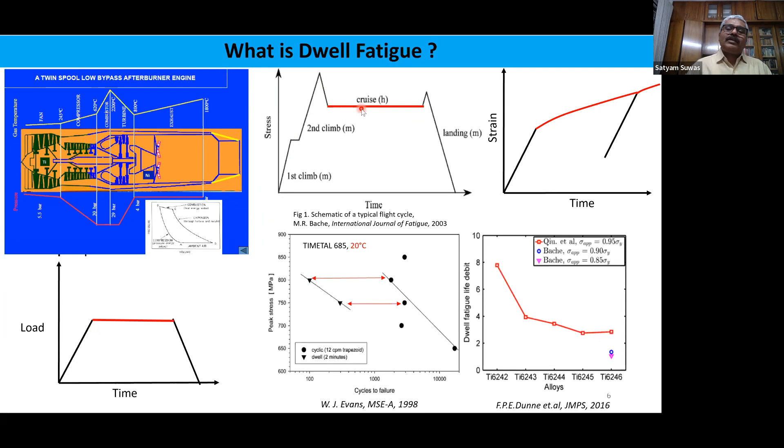And then this holding of aircraft at this level of stress actually leads to quite a lot of interesting phenomena, which are not very interesting from the user's point of view, because it leads to some amount of degradation in properties of the material and components, and therefore we have to find out the reason for this.

And this was known for a long time. In fact, in 2003, a comprehensive paper was published by Professor Bache from, I think, England, and he has given a complete comprehensive analysis. But this was a phenomenological analysis.

Later on, many investigators have associated this phenomena with crystallographic attributes, also with textures. Many texture people got interested in it, and the intensity of work has increased ever since EBSD techniques have become more common.

This phenomena is seen in many metals. First it was reported in Timetal 685, also known by RMI titanium as IMI 685, observed at 20 degrees Celsius, that is ambient temperature. One main reason attributed to this is room temperature creep in the system.

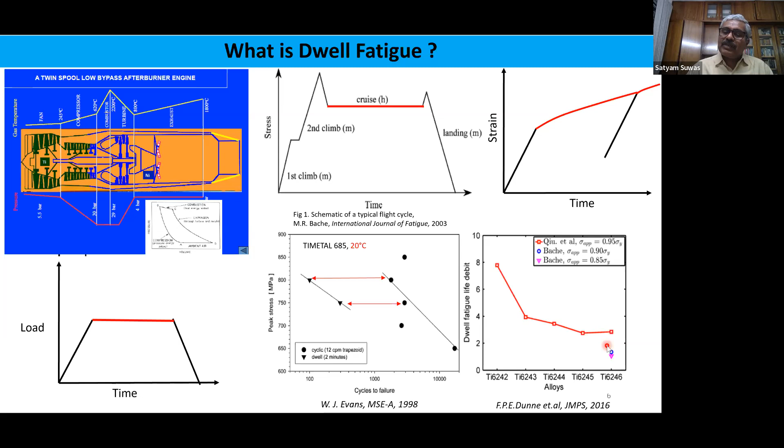Though it qualifies for all other good aeronautical properties, it has a very strong sensitivity towards dwell fatigue. Dwell fatigue debit is a kind of parameter for the early occurrence of fatigue damage, and it is maximum for this alloy. Once one adds more alloying elements, basically increasing molybdenum concentration, it becomes saturated, but still there is dwell fatigue observed in this material.

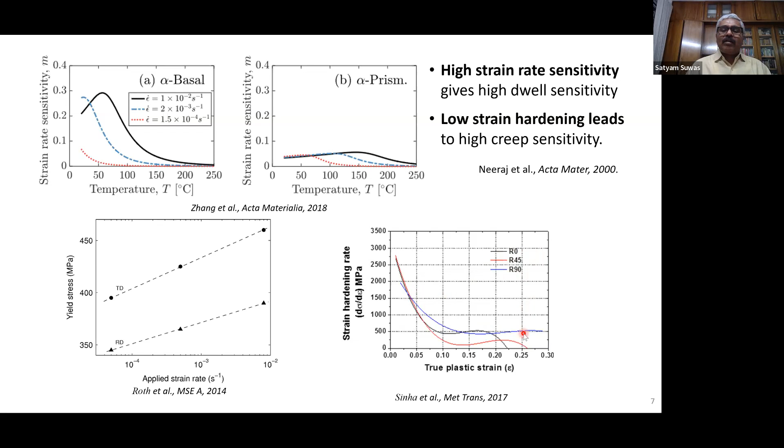Also, the strain hardening rate in titanium is sensitive to the direction in which we take the sample, again a function of texture. We can see that along rolling direction, at 45 degrees to rolling direction, and at 90 degrees to rolling direction, we have different responses of strain hardening rate versus true plastic strain.

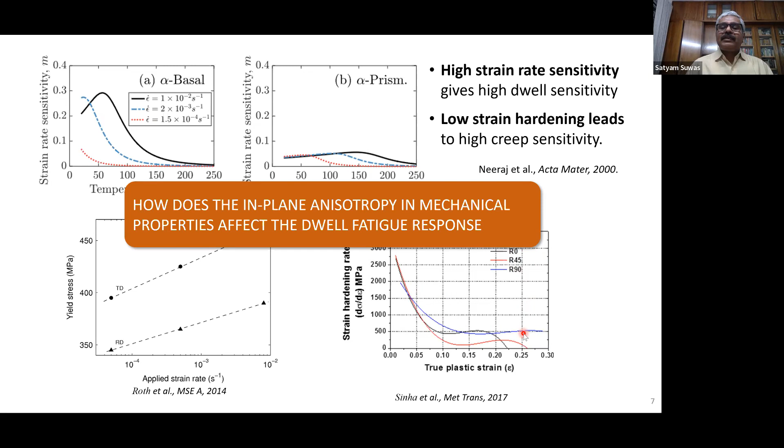Now we wanted to examine one by one many reasons that would lead to this dwell fatigue response, so that remedial measures can be recommended for this material one after another. The first thing is in-plane anisotropy, that is one that we wanted to see.

So first is strain rate sensitivity. Second is anisotropy, that means the texture. Third is the propensity of grain boundary sliding. And this again is a function that is sensitive to the direction and the texture of the material.

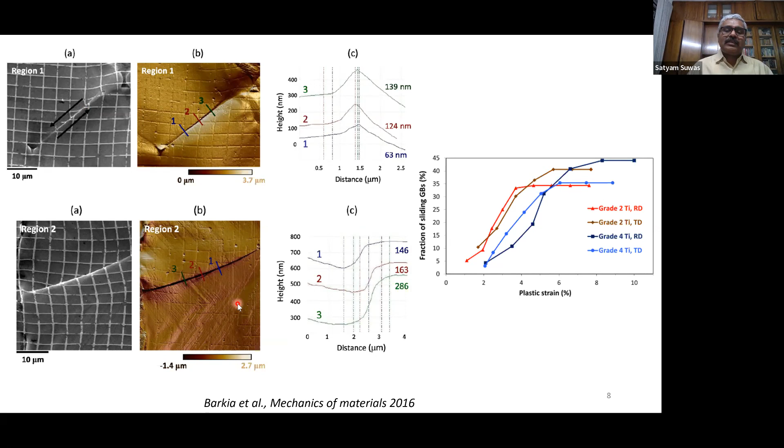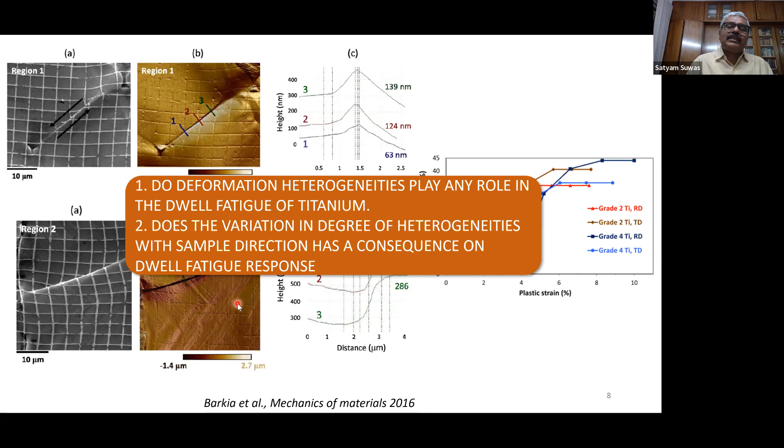So now the question is whether deformation heterogeneities play any role in the dwell fatigue of titanium, because the heterogeneities we could see here very clearly. We also wanted to examine whether this variation in degree of heterogeneities with sample direction has a consequence on dwell fatigue response. This was a very comprehensive work done by Adam Pilchak and Jim Williams, and they examined the dwell fatigued sample.

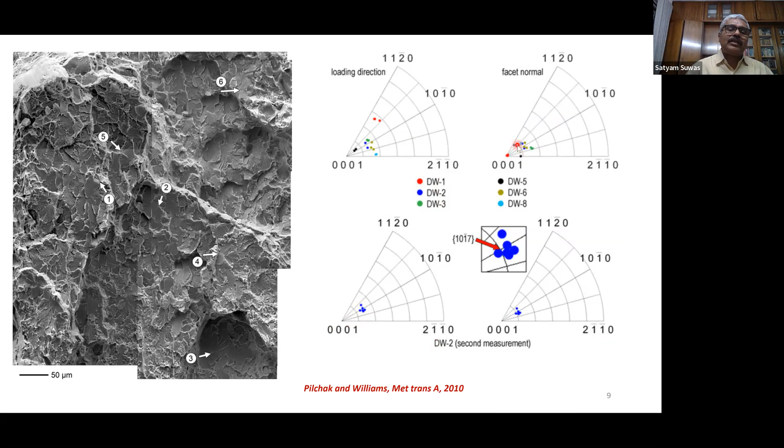They examined the fractography of the dwell fatigued sample, and found that most of the grains where fatigue crack initiation has taken place are very close to basal orientation. In various cases this has been examined, and almost all the orientations of grains where dwell fatigue cracks have initiated are primarily close to basal orientation. May not be exactly basal, but very close to it, like for example here it was identified to be {10-17} orientation.

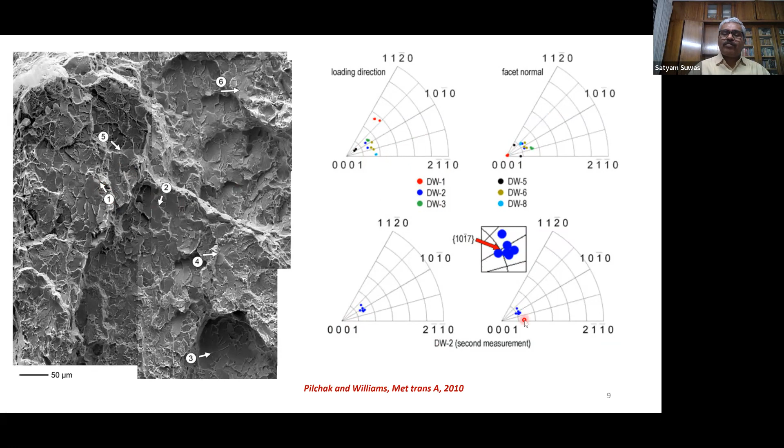So the theory behind this, the knowledge generated so far was, the first model is the Stroh model, and it says that fatigue cracks will initiate when a soft grain meets a hard grain. In that case, fatigue crack initiation takes place because of the pileup of dislocations at the boundaries of the hard grain.

There have been several other investigations, and I would like to mention one particular thing which came from Metz. Lionel Germain and Nathalie Gey did this work on IMI, if I remember correctly it was IMI 834, and they identified that the material prone to dwell fatigue had very strong macro zones. This validates the Stroh model, that wherever there is a strong basal orientation, the basal grain should be surrounded by non-basal grains.

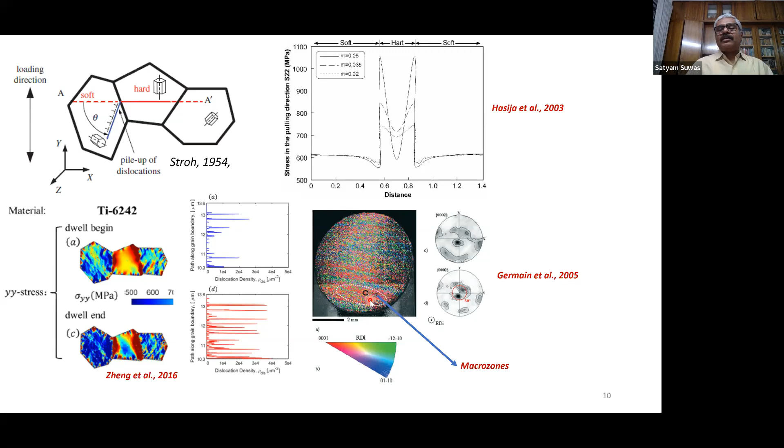In that case, macro zones will form, and this could lead to dwell fatigue debit, meaning the propensity of reducing the life under dwell fatigue loading conditions. So these are some of the available knowledge.

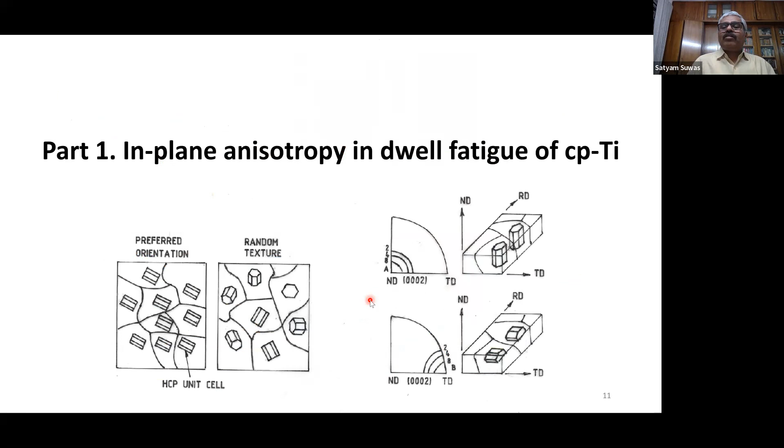So we wanted to examine this systematically, and first we investigated the in-plane anisotropy of dwell fatigue. We just took CP titanium, because the alloy has shown varying response between different alloys, and the phenomena explained by all the theories just deal with HCP phenomena related to titanium. So we wanted to exclude all variables, including the presence of beta phase which occurs in alpha-beta titanium alloy as seen in most investigations. So we just took commercially pure titanium and examined the fundamental aspects of dwell fatigue propensity.

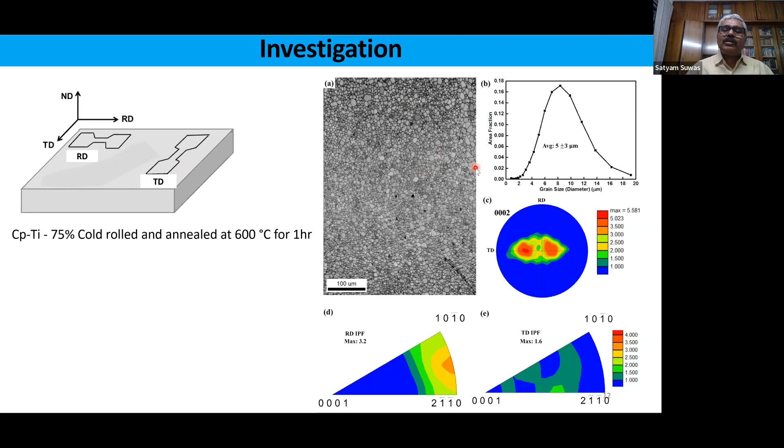First of all, the anisotropic aspect: we took a plate of CP titanium obtained by cold rolling and annealing, with nice equiaxed, very fine grains, about 5 to 8 microns in most cases, and it had a split basal texture, which is very common in titanium. TD split texture is common in titanium or any hexagonal material with C by A ratio or axial ratio less than critical. This was observed, and then this material was taken further for study.

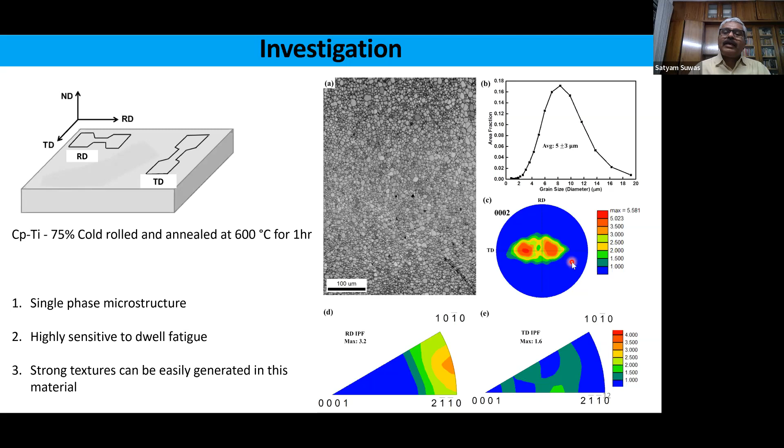Because this combination, according to us, would lead to high sensitivity for dwell fatigue. And since in CP titanium it's easy to generate very strong basal texture, we generated it and then did the test of this material, and here is the result.

This is the loading cycle that was employed. In order to have a comparative idea, we did normal fatigue with this kind of profile: one loading and then unloading, loading and unloading. In the other case, for the dwell fatigue condition, we loaded it, kept it at that load for 120 seconds, for 2 minutes, and then unloaded it, and the second cycle starts in the same way. So this is the normal fatigue, and this we will refer to as dwell fatigue.

The strain versus cycle plot very clearly confirmed what was anticipated from indirect responses about anisotropy: the material extracted along the transverse direction showed dwell fatigue sensitivity in this manner, accumulating very high strain in a very short cycle. For the material along the rolling direction, the strain accumulation versus number of cycles followed a different trend. Under normal fatigue also this was similar, only the degree was a little higher in the case of dwell fatigue compared to normal fatigue conditions.

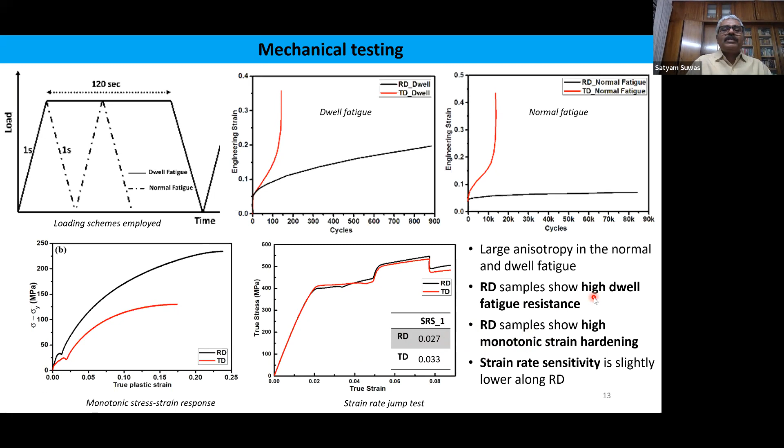Then we examined the formation of texture in this material: the way these grains hardened, or the way the texture evolution took place after deformation along the rolling and transverse directions, made a contrast. For example, the sample extracted along the transverse direction and subjected to tensile test underwent stronger changes in texture, or has textures slightly different from the one tested along the rolling direction.

We could see here the changes in the texture. Like tensile, the rolling direction samples under tensile testing accumulate strain and get oriented mostly along the RD direction after the tensile test, which is expected. In dwell fatigue, they also accumulate strain along this direction, but under normal fatigue the texture seems to have weakened, and the TD direction sample never acquires any strong texture.

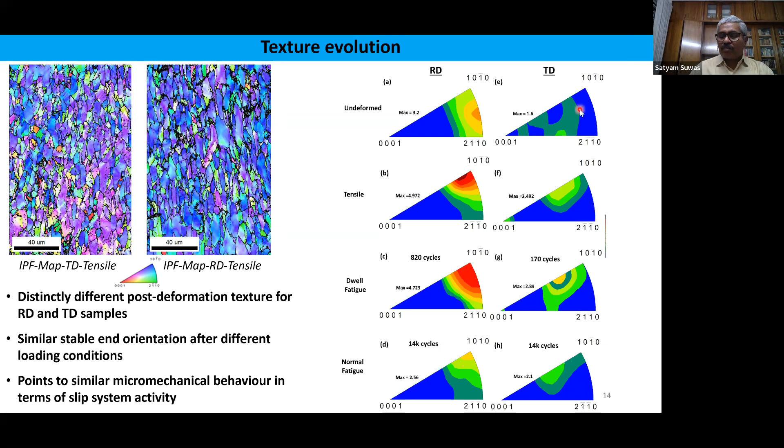So we just examined the slip response along these directions. Schmid factors were calculated for basal, prismatic and pyramidal slip systems, the three important slip systems in hexagonal materials. We calculated the slip response for all three types of slip, and we could see that the responses were different.

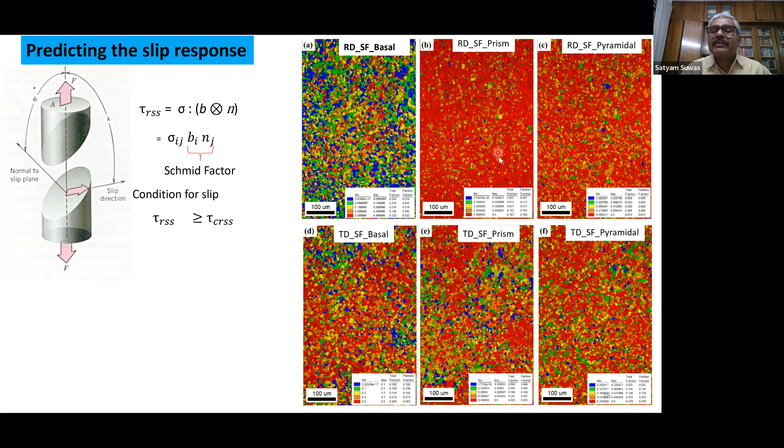For example, for basal slip, this figure has small numbers, and it shows the fraction increasing, the minimum increasing from red to blue. So if there is more red, that means there is a maximum value of Schmid factor for those cases. So the responses were different and mixed for all the cases.

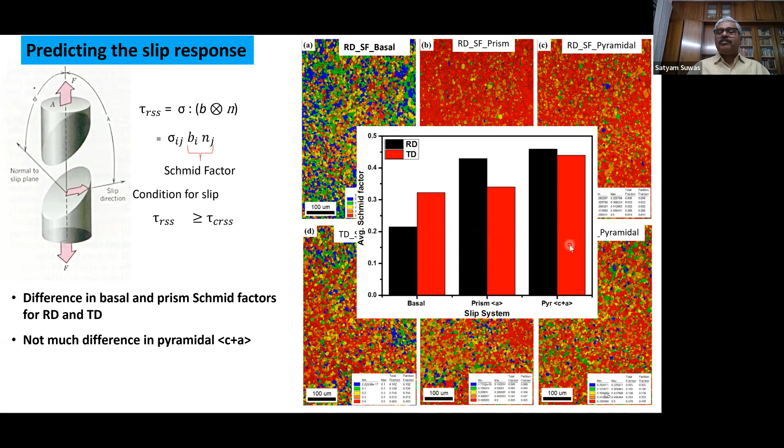Here it's more clear, extracted from the same data: the average Schmid factor for basal slip was lower for the rolling direction sample and higher for the transverse direction sample. Similarly for prismatic slip, the order was reversed, and for pyramidal slip it was almost similar with a little bit of difference.

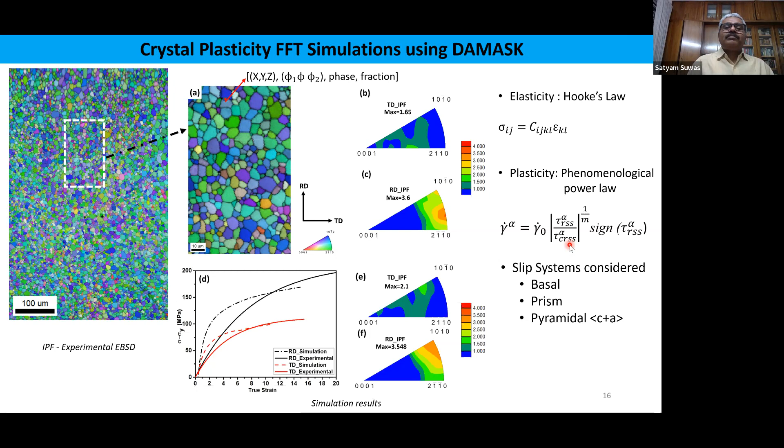This was also subjected to investigation. The prediction of strength anisotropy was carried out using Dusseldorf-originated software, DAMASK, which almost everyone uses now. Particularly this part of the experimental scan from EBSD was used, and this is enlarged here.

We used this simple phenomenological power law, considering all three types of slip systems, and calculated the inverse pole figure. Most importantly, the stress-strain curve was calculated after deducting yield strength. We could see the differences were almost in the same order, except that saturation occurred much earlier with simulation, with a little deviation from experiments at higher and lower strains, but the curve passes through this, so this much deviation is expected.

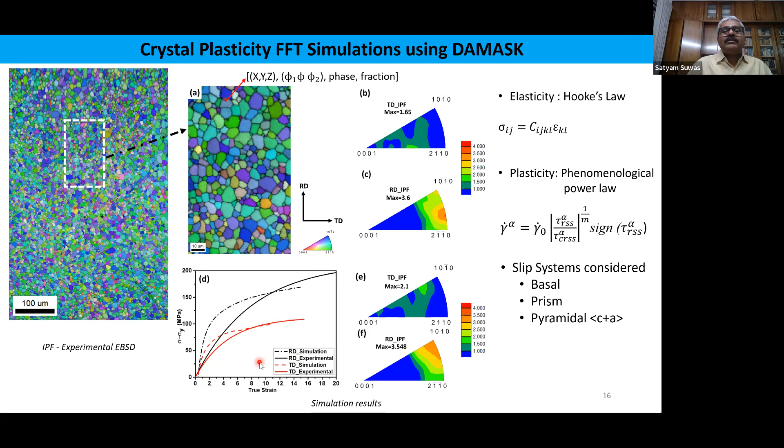Now the prediction of activities of slip systems is seen here. For RD loading, there is higher prism and lower basal slip activity. For TD loading, there is lower prism slip and higher basal slip activity.

It's also to be noted that titanium shows anisotropy in stacking fault energy, so the hardening behavior is also influenced by this anisotropy. On the prism plane the stacking fault energy is about 150 millijoules per meter squared, while on the basal plane it is 300 millijoules per meter squared. So it's as good as working on different materials, if we consider the FCC-type situation.

So after that, we could predict the activities. The slip activity maps are shown here. For RD samples, the basal slip activities are shown, and the propensity of a particular slip activity is shown through this scale, with the highest being red.

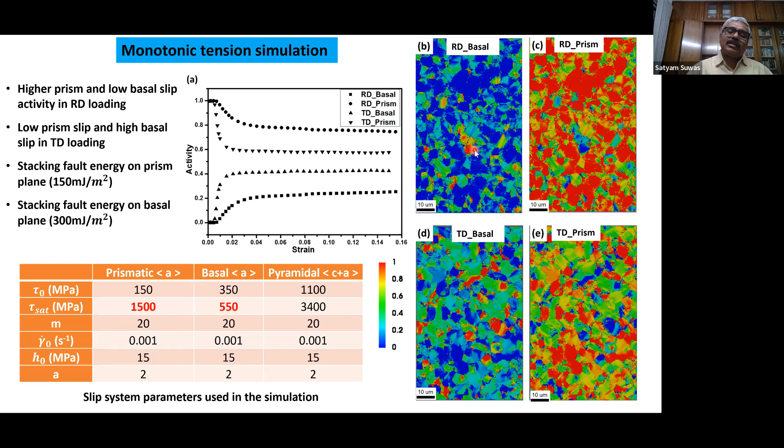Here we could see some hot spots, the red ones. For prism slip, it is obviously the inverse, so it's maximal here - it's prism dominated, the red one.

Then similarly for the TD case, the trend was different. For basal, it has shown more hot spots here and there, in all these cases. And for TD prism slip, it has again shown lots of hot spots, higher propensity of Schmid factor here.

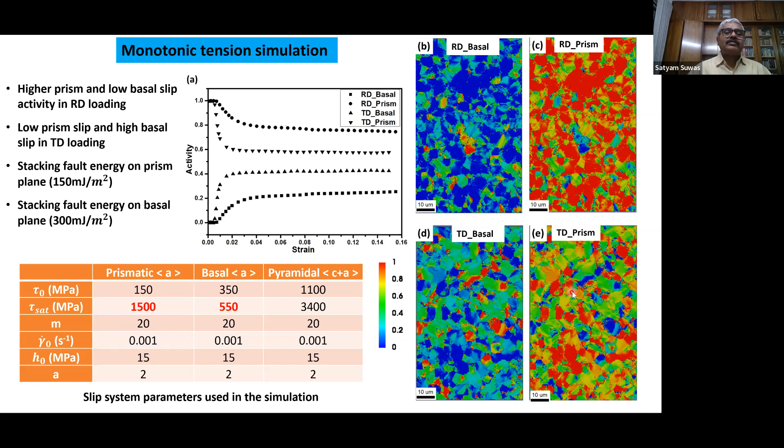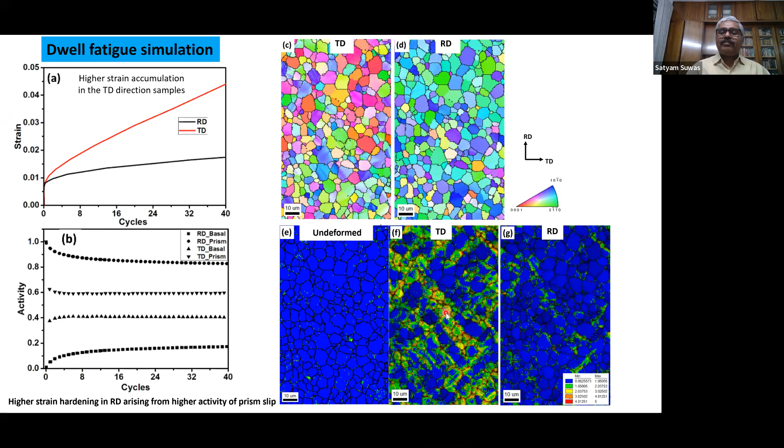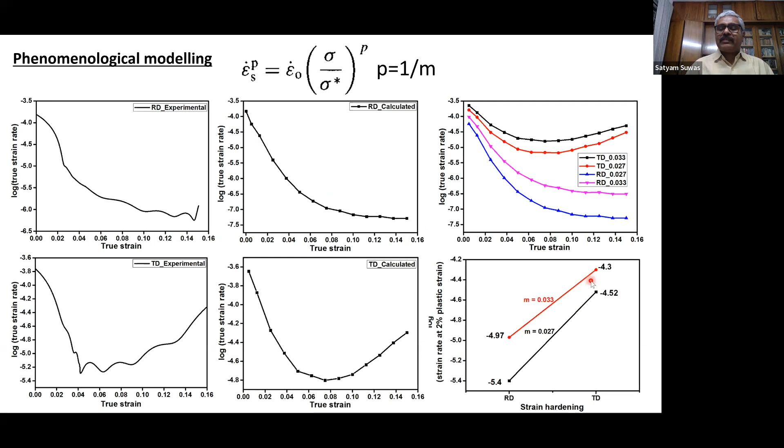These fatigue tests were also modeled, and basically strain hardening and all kinds of modeling was done for strain rate versus strain under these cases. We could see almost a very similar situation as in experimental cases, and we could also see the strain rate sensitivity values as anticipated, as per whatever we experimentally calculated.

So with this understanding, we could summarize this part: a larger planar anisotropy is observed in dwell fatigue response, and it is definitely anisotropic. Dwell fatigue life is higher along RD than TD, and strain rate sensitivity is lesser in the case of RD than TD. Strain hardening response is higher in RD than TD, and activity of prism slip is more in RD than TD, which is responsible for intrinsic strain hardening of the material and also accounts for the difference in stacking fault energy.

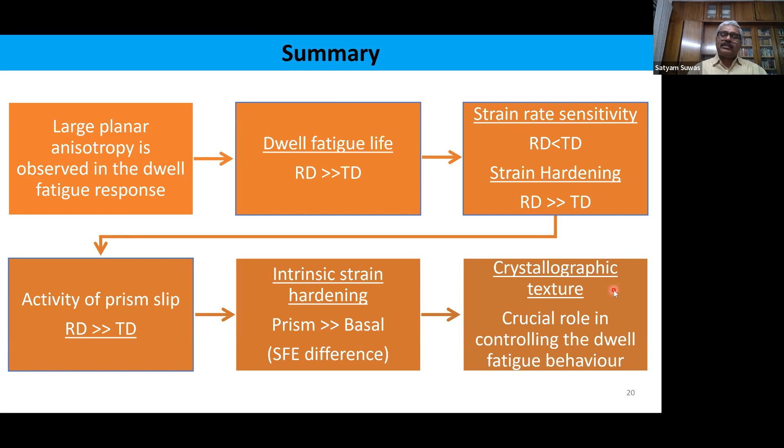This clearly tells that texture plays a crucial role in controlling dwell fatigue behavior. We have not changed different types of texture, but just extracted samples along different directions, which essentially represent two different types of textures. The planes are the same, but the directions are different, and this indicates that the dwell fatigue phenomenon is texture sensitive.

To our surprise, when we examined the deformed microstructure on these well electropolished samples, we did some profilometry and could see differences. We could see the formation of ledges along the grain boundary. In the case of RD samples, the grain boundaries looked very normal, while in the case of TD samples, we could see ledge formation.

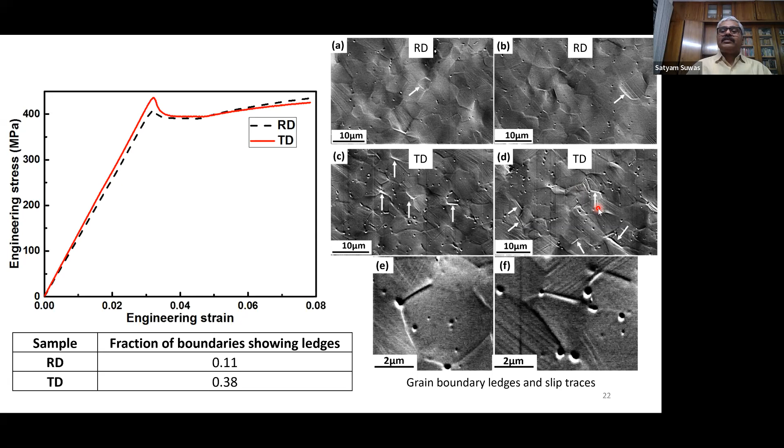This is also a function of the direction in which we extracted the sample, and we could clearly see a substantial difference in the grain boundary fraction consisting of ledges between RD and TD samples, almost 4 times more ledges observed in TD samples. Roughness of the sample was also measured; all were initially polished to the same extent, but TD samples were clearly rougher than RD samples.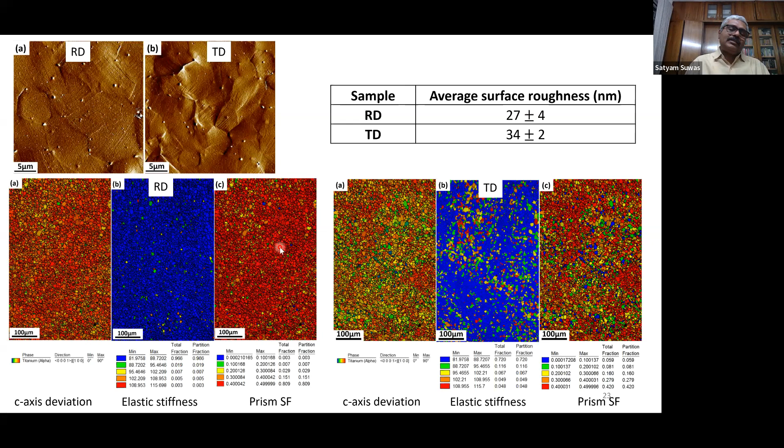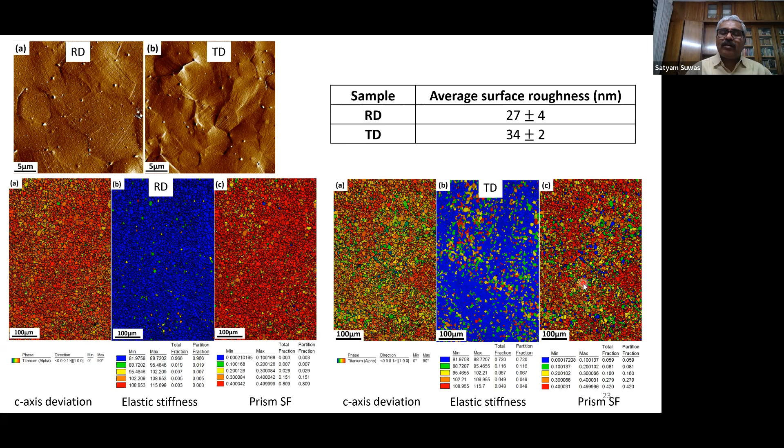A similar investigation was done in the previous case, but here we completed the whole investigation on one sample for which we measured these microstructures, and we could see a difference in the trend observed between RD and TD.

We tried to measure the KAM for these two samples, and there is some difference in KAM values, kernel average misorientation values, from the EBSD maps between RD and TD samples. About 25% difference was clearly observed, and in TD samples, as evidenced earlier, there is strain accumulation right at the grain boundary, and therefore a larger misorientation along certain grain boundaries.

So we can see that all these changes in KAM values are very apparent near the grain boundaries. Basically, the grain boundary affected zone has more slip systems active in order to have compatibility with another grain. So it is quite expected, but the degree was totally different in both cases.

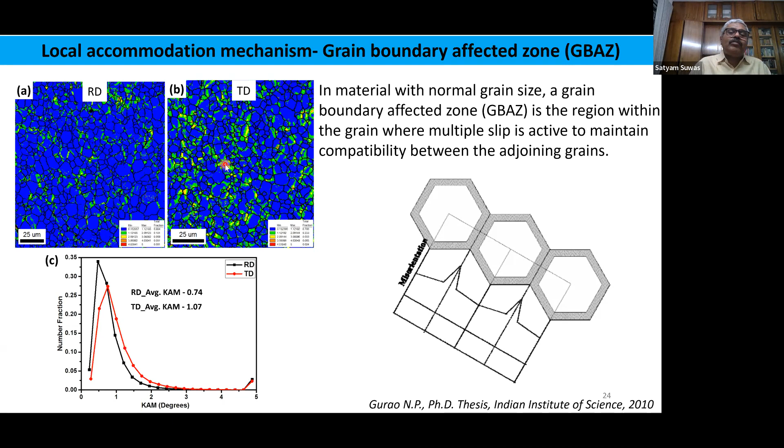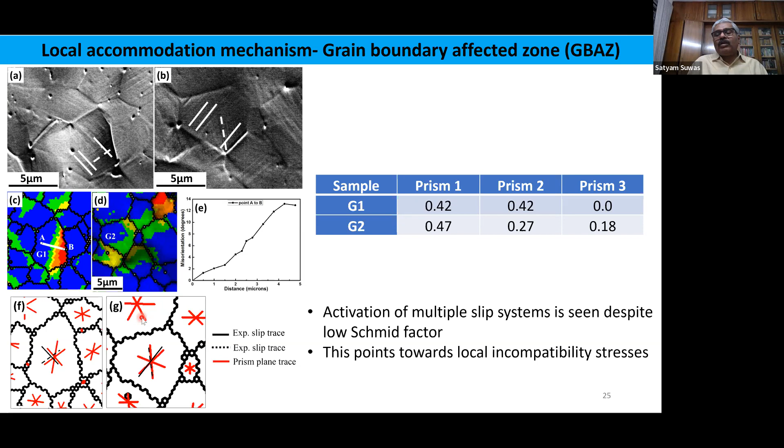We also measured the slip traces. Despite a low Schmid factor in these cases, the activation of slip trace analysis was carried out. These are the experimental slip traces, the dotted and black ones, and this is the prism plane trace plotted here in red. We could see activation of multiple slip systems despite the low Schmid factor for the prismatic slip, and this points towards local incompatibility stresses in the material.

We also did transmission electron microscopy to see whether the observations from EBSD and KAM analysis are true. We could indeed see that in the TD samples there is accumulation of dislocations at the interface, which was reflected in EBSD by higher KAM regions.

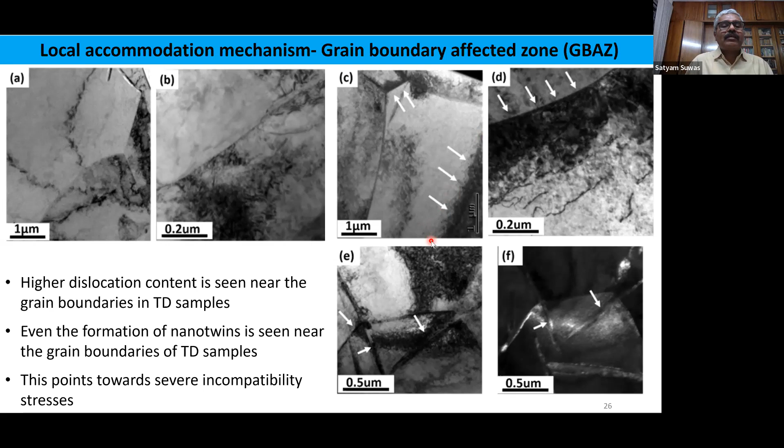To account for the local accommodation mechanism, we tried to see whether this would lead to grain boundary sliding, because this dwell fatigue phenomena is related to the room temperature creep of the material. So we wanted to see whether there is an element of grain boundary sliding here.

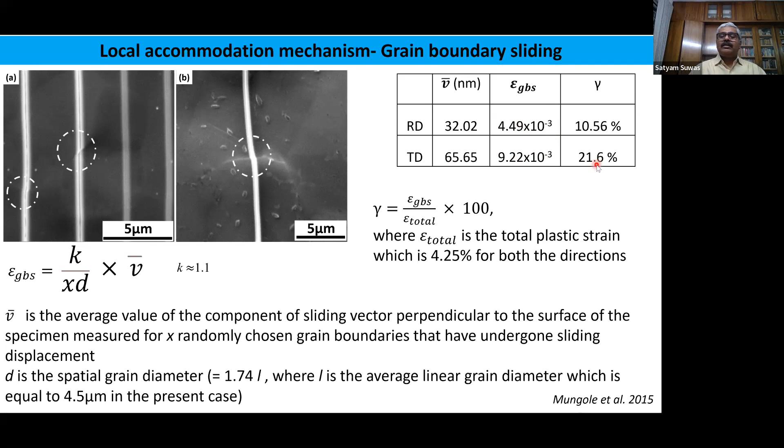We have seen that the strain was calculated for grain boundary sliding by this method, which is a geometrical factor given in this formula, and the strain for grain boundary sliding is given here. This also has a difference between, almost double for the case of TD compared to RD. So again, further confirming that textures have to play an important role.

Then we examined, going back to the Stroh model for soft and hard grains, and also the misorientation between two grains. We try to examine the incompatibility between the grains, and we use the Luster and Morris criteria for defining whether a particular slip plane is incompatible compared to the other slip plane in other case. This was measured by a parameter called M prime as given in the Luster and Morris paper.

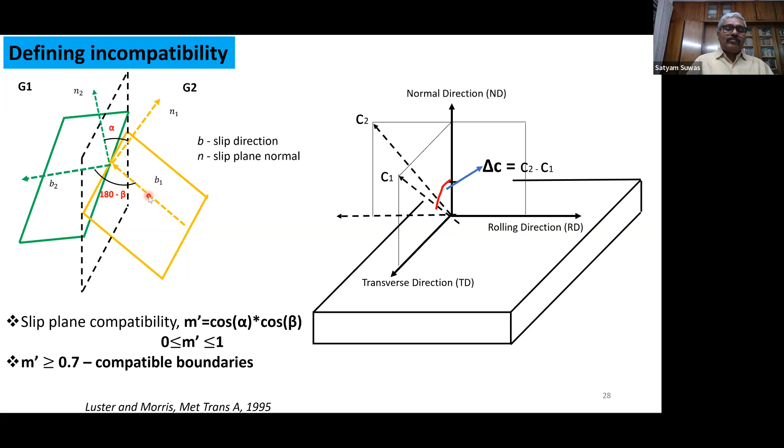These are the two angles, cos alpha and cos beta. Alpha is this angle, and 180 degrees minus beta is this. So we just measured the slip plane compatibility here, and the criteria is that if this M prime is more than or equal to 0.7, then the boundaries are compatible.

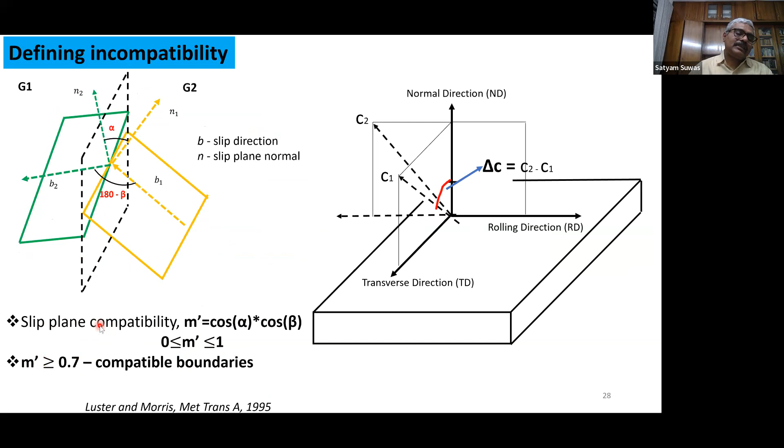So these are basically, if we go back, we could see that the higher it is, if higher than 0.7, then it is a compatible boundary. So 0.7 is the criteria here - in this case it is compatible, in this case it is not compatible. So this is also fitting very well with our concepts of ledges and all that.

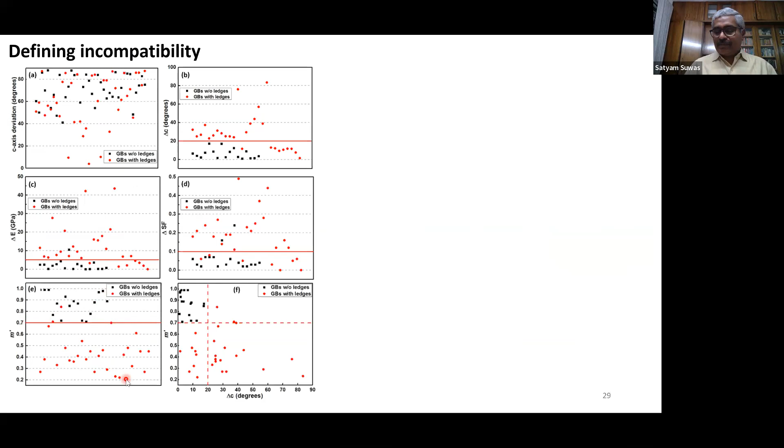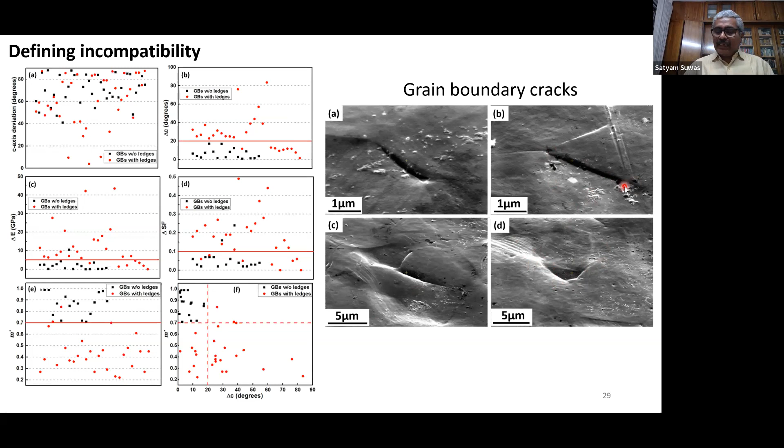Then we thoroughly examined the samples more carefully, and this time we saw the cracks, and it was like catching a fish in a sea. We have just seen that there are cracks quite obvious, more frequent in the case of the TD samples along the grain boundaries. Then, of course, the pole figures indicated for the TD samples are just rotated by 90 degrees in this case.

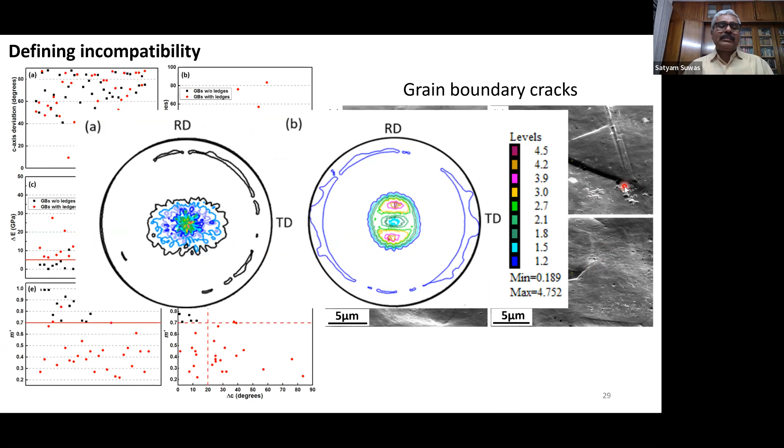So the summary of this part of the investigation is: deformation is extremely heterogeneous with significantly higher extent of grain boundary affected zones and grain boundary sliding when deformed along TD as compared to RD. And the boundaries with a geometrical compatibility factor M prime lower than 0.7, and the delta C angle between the adjacent grains greater than 20 degrees, are incompatible boundaries.

The number of such boundaries are higher when loaded along TD. Therefore, it is more prone to dwell fatigue situation. And since there is higher heterogeneity of deformation, the TD samples show low strain hardening, high strain rate sensitivity, hence low dwell fatigue life - meaning they are more prone to dwell fatigue.

They are not good as far as the application point of view is concerned. This also shows that basal texture is less prone to anisotropy and deformation heterogeneities, and is suitable for design against dwell fatigue.

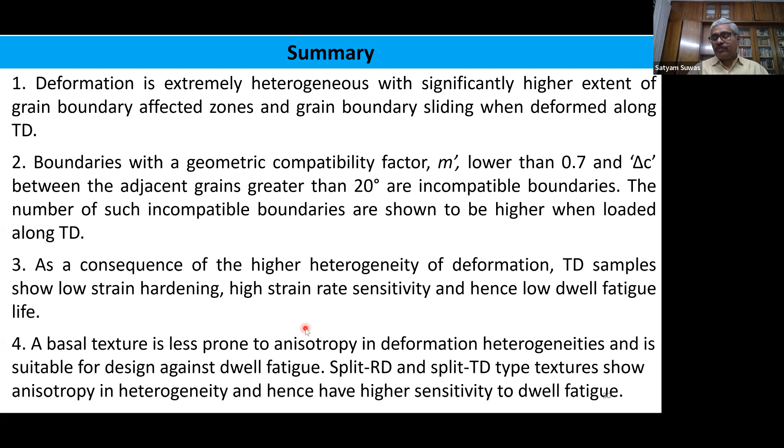The split RD and split TD type textures show anisotropy in heterogeneity, hence have higher sensitivity to dwell fatigue. So this was also a conclusion.

Now, what are the crack nucleation mechanisms? So far, we have seen in what conditions cracks are forming, under what situations of grain boundaries, what conditions of Schmid factor, what conditions of orientation lead to a situation that causes crack formation.

Now for crack nucleation mechanism, we switched over to the actual alloy. We had enough data and experience with CP titanium, and then we took a real alloy from the funding body, the Indian Defense Organization. So we took this alloy, IMI 834, which is so far the highest temperature alloy used in gas turbines for titanium.

We just did some heat treatments. This is a standard heat treatment given before this is used as a forged disc or turbine blade. Generally it is used for discs, it's a disc alloy. So we carried out the disc deformation and annealing, and that generated this type of texture.

We can see here this is a very weak basal texture, and fully equiaxed microstructure. Initially we wanted to gather information where this beta phase, seen here, should not intervene in our interpretation, so that we can get pure information about just the orientation and alpha-alpha boundaries.

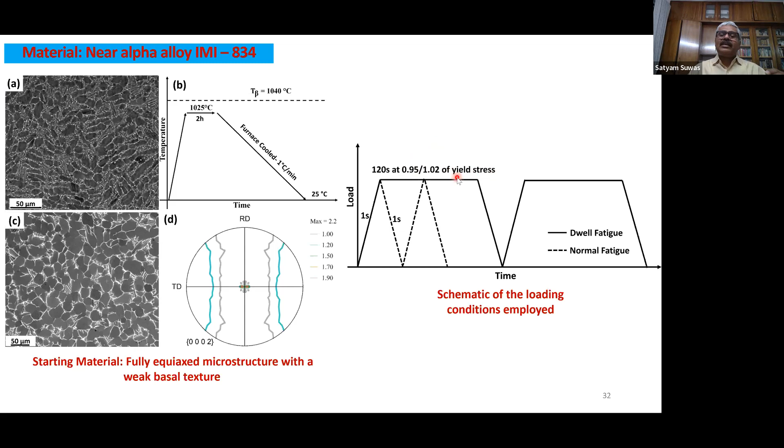This sample was subjected to a similar type of cycle as in the previous condition. We have seen the normal fatigue and the dwell fatigue results. We tested it at two levels relative to yield stress: one at 95% and one slightly over the yield stress value. There is a reason for that, which will come later.

This is basically the test protocol for this alloy. So we followed that, and we could see for the 95% loaded samples, again we compared for one particular sample. Here we have not taken the orientation aspect.

We have just taken the as-received sample, and we could see there is a difference between dwell fatigue response and normal fatigue for both the 95% of yield strength loaded sample, and the difference becomes far more if the loading stress is higher than the yield stress.

We cycled it, and we could see that the number of cycles to failure, NF, for 95% dwell is 4,193, while for normal fatigue it is almost double. So the dwell fatigue debit is 2 here.

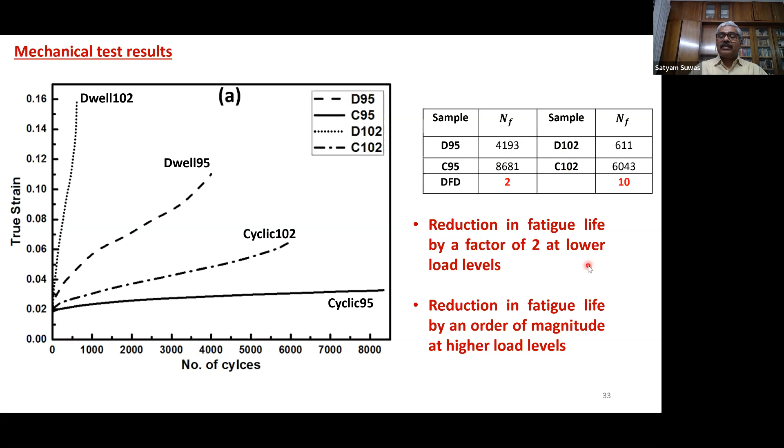For higher loading stresses, the difference is quite substantial and it becomes 10 times. That means the damage accumulation is higher if the loading stresses are higher, but it is much more in the dwell condition than in the normal fatigue condition. So this is a very very interesting thing.

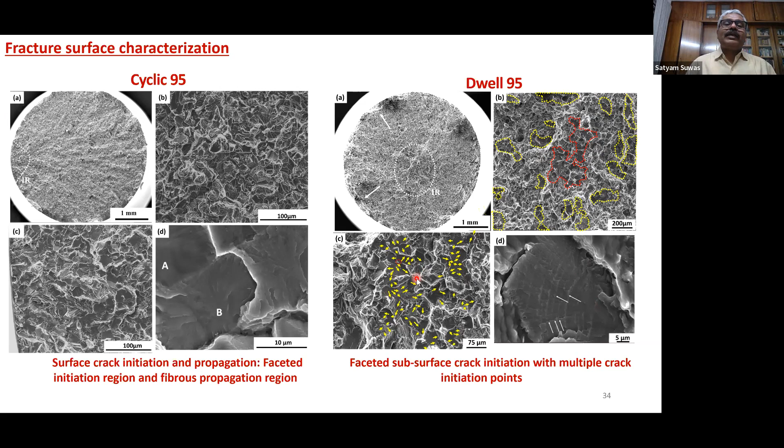All these points are marked with red here, these are the crack initiation points, also indicated as ridges. Obviously the damage for the same amount of loading stress is more in the case of dwell fatigue loading condition. A similar situation we could see for higher loaded samples.

Here you could see the fracture surface. In this case, for the dwell fatigue samples with higher load, it was so fibrous we couldn't even identify the crack initiation regions. In this case also it was very difficult to see, but this is for sure that there is a difference.

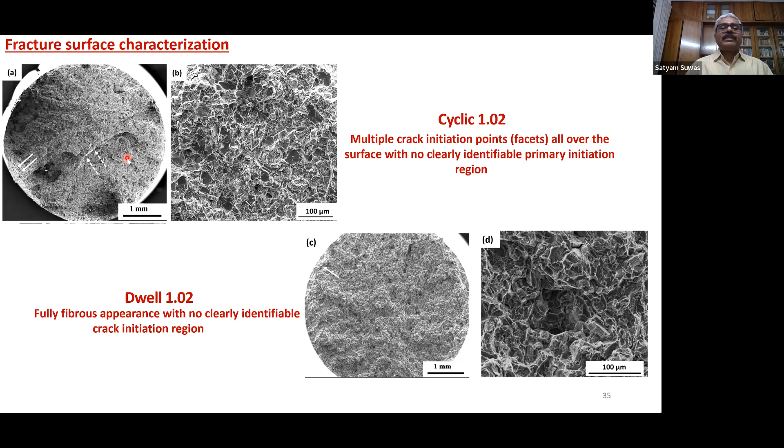We also polished the sample and saw the crack formation. For cyclic condition, if we consider load as a parameter, we could see there is more cracking or crack initiation propensity in the higher loaded samples. And for dwell, for the same load, dwell shows more number of cracks. This is a very clear observation.

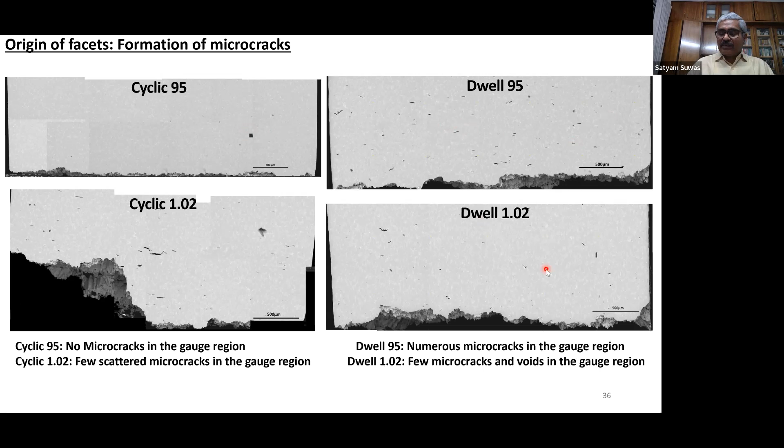We analyzed these cracks carefully and saw the orientation. These were subjected to EBSD investigations in those regions, very carefully picked up, and then we measured this.

For the dwell subjected material at 95% loaded, we see that some cracks were far from the basal orientation, but most of the cracks were within a 40-degree range of the basal orientation. In this case it was quite spread. The crack initiation for higher cyclic loading was very strange in this case.

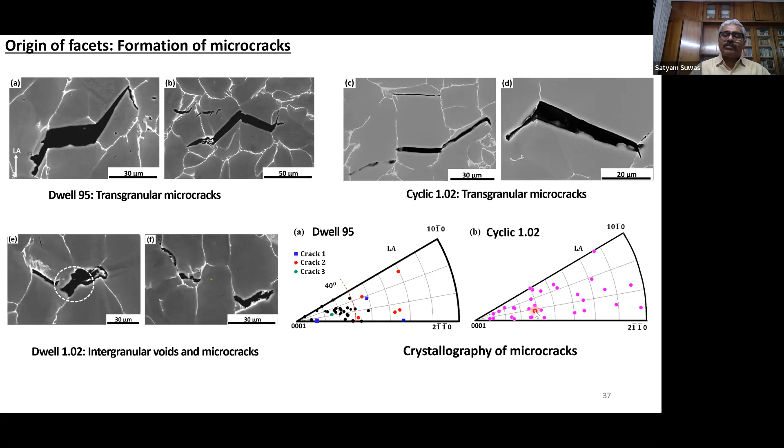So then we tried to model it with the Stroh model, to see whether this soft-hard grain combination works or not. This particular orientation was examined, the slip traces were studied, and this is particularly a crack. So grains G1, G2, G3 are mapped here in the pole figure. We could see clearly the C-axis deviation for G3, and between G3 and G2 there is a separation.

The crack is between G3 and G2. We could see 50 and 15 here. In this case, the C-axis deviation, elastic modulus deviation, and other factors are visible. It was very clear, so here we used all our accumulated knowledge so far: the parameter M, C, E, and also the slip propensity of prismatic slip.

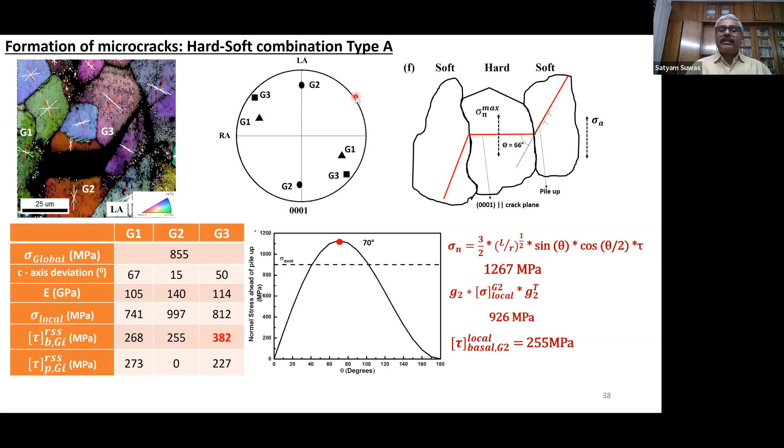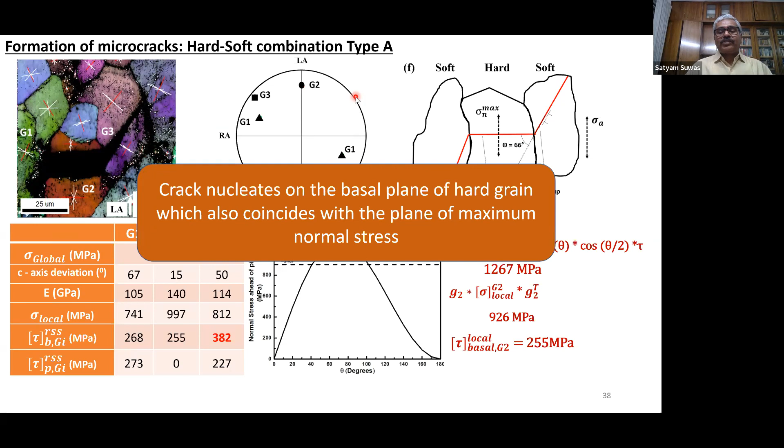We could see that in one type of situation the hard-soft combination indeed works, and the Stroh model is valid in this case also. The crack nucleates on the basal plane of the hard grain, which also coincides with the plane of maximum normal stress. Now the other combination, another crack which was examined, again G1, G2, G3 here, where we have soft grains.

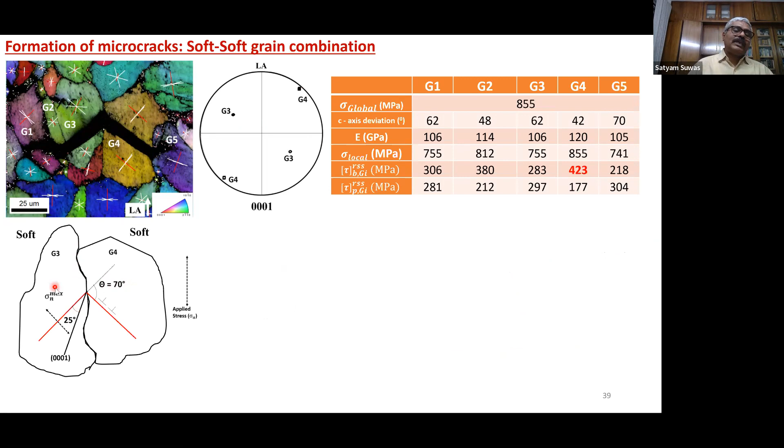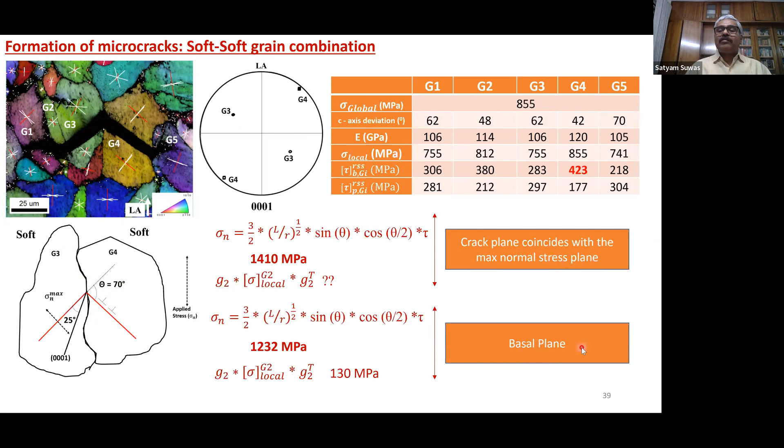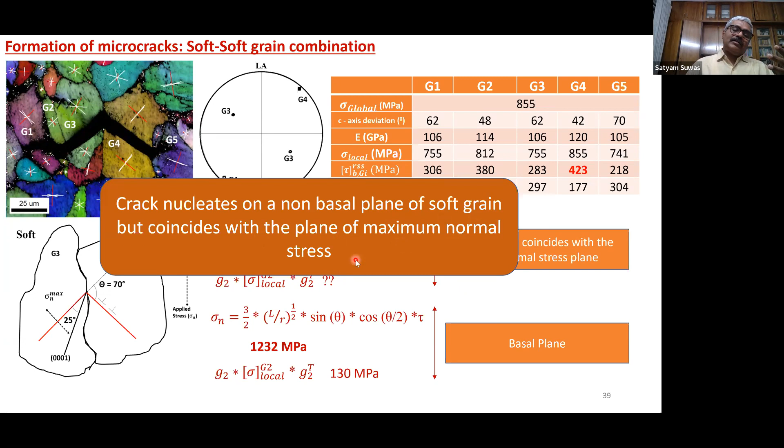As I said, there were some cracks seen between soft-soft cases also. In that case, the crack plane coincides with the maximum normal stress plane, and this is the basal plane. So the conclusion is crack nucleates on a non-basal plane of the soft grain, but coincides with the plane of maximum normal stress. So the second factor, orientation as well as the Schmid factor, is also playing some role.

Now the hard-soft combination is also examined. Without going into detail, we did a similar analysis and found that the crack nucleates on a non-basal plane of the hard grain and does not coincide with the plane of maximum normal stress.

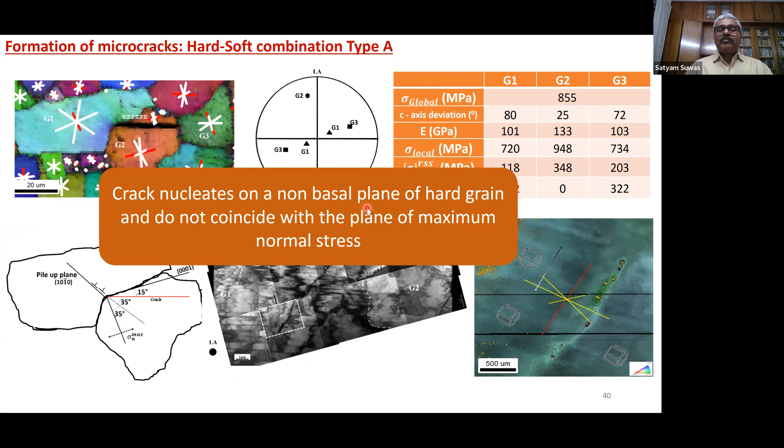Now, there has been some theory that observations related to orientation or any parameter not related to the hard-soft combination could be misleading, because we see only one plane of observation. So if we look at 3D microscopy, we can see which grain is above and below the grain in which the crack is initiating.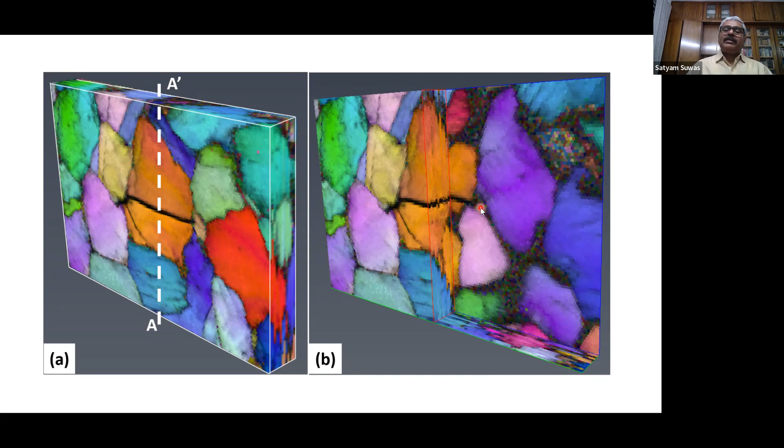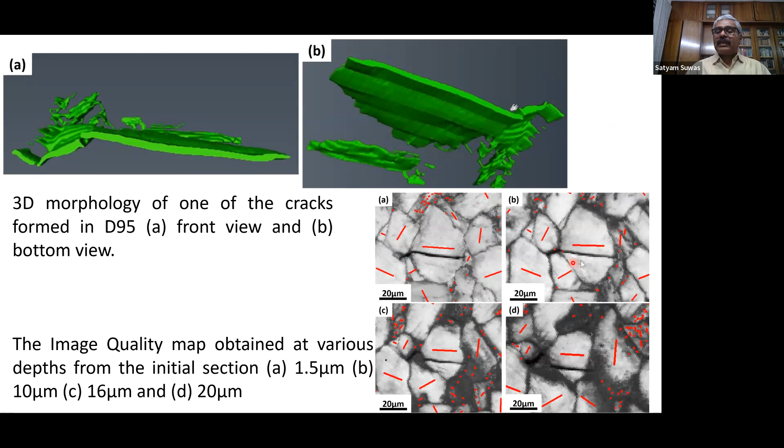This exercise was also done, and we could see, even after examining the three-dimensional microstructure by FIB and EBSD, a similar kind of trend. We also extracted the morphology of cracks, as shown here, for all the cracks we analyzed. A lot of data was generated in this case.

This exercise led to the conclusion that the imposition of dwell time leads to higher debit in fatigue life than that caused by increase in load, that is 95 versus cyclic 95, versus cyclic 102, and 102 means over and above yield stress, versus cyclic 95 versus dwell 95. So dwell time is the main culprit in this case.

Higher load in combination with dwell time leads to voids and micro cracks at the grain boundaries. Higher loads without dwell, and low load with dwell, lead to crystallographic and transgranular cracks, which we have just seen. The crack is nucleated along the plane of maximum normal stress caused by pileup in the neighboring grain, that is the hard-soft and soft-soft combination. Grains favorable for basal slip are found to be more amenable to crack propagation than those favorable for prismatic slip.

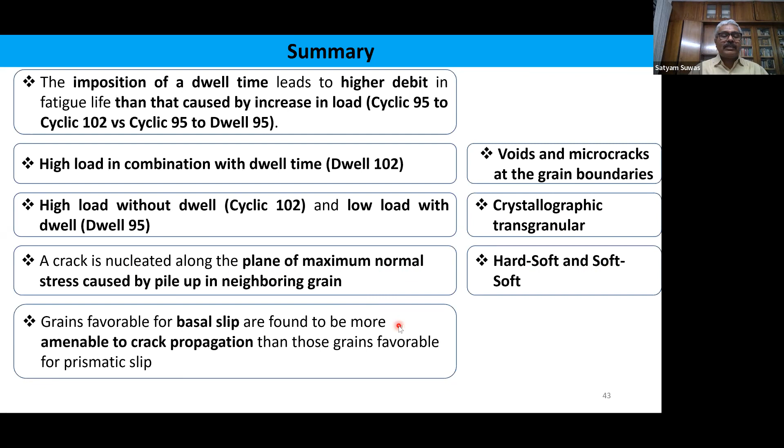So I think, do I have some, shall I stop here and start discussion, or shall I continue? Well, yes, I think if we want to leave some room for discussion, I could suggest you round up now.